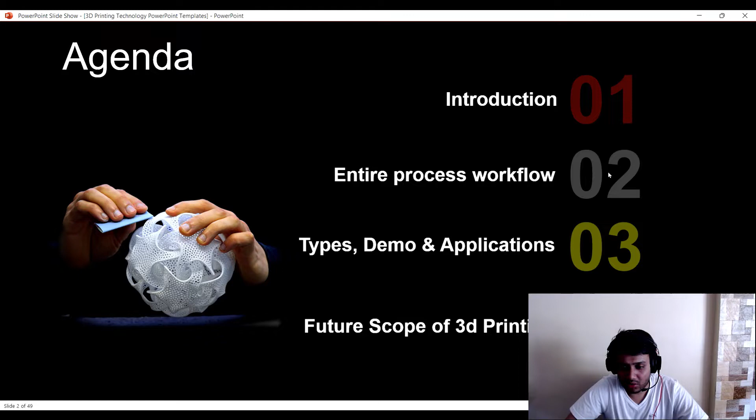So to start, let me ask my audience, you have been engineering students. Rather than saying, I should be asking you, tell me what are the differences between subtractive and additive manufacturing, or let me know the advantages of additive manufacturing over subtractive manufacturing. You could use your chat box. I will be noticing it.

So I will try to log on from one of my screens. I want some more people to try. Come on. What do you think will be the advantages of additive manufacturing over subtractive? Even the coordinators could try this out. Come on, everyone. What do you think?

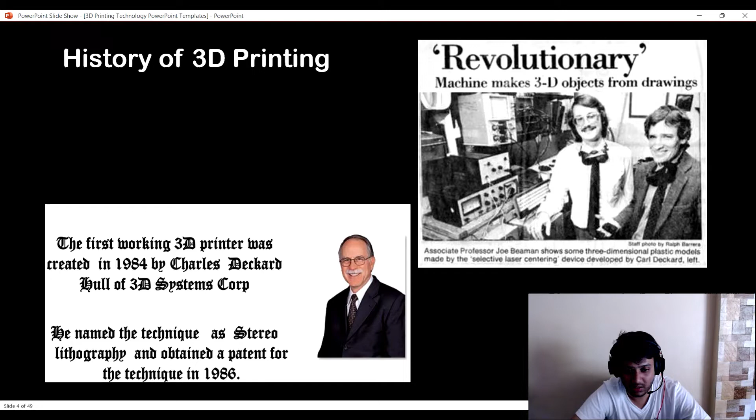Two people invented this; this was the first SLA machine. Again, what is SLA? We will go into detail. While these concepts were taking shape, a person named Charles Hull coined the term 3D printing and additive manufacturing in general. He is considered today as the father of 3D printing, and he founded a company named 3D Systems Corporation. We still consider his achievements insightful.

So to define 3D printing or additive manufacturing: it is a technology in which you form your products from a digital CAD file, in the form of a computer aided design, and that creates a solid three-dimensional part additively, layer by layer. When I say the process is additive, focus on the word layer by layer.

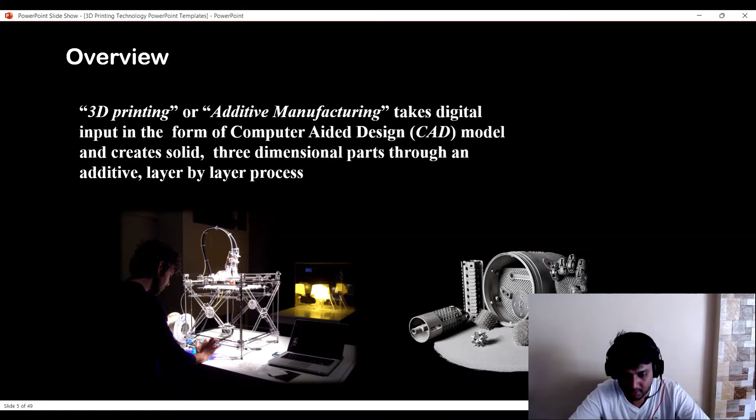There are different additive manufacturing techniques available in industries, or 3D printing methods in general. We will go through the major classifications of techniques. Let's start with the first, most common, and highly used by industries: fused deposition modeling, or FDM.

In this method, a strand of plastic filament is pushed through a heated nozzle, and that heated nozzle moves in a programmed pattern which places the heated plastic strand in the shape of a single layer of the part. This machine prints material layer by layer in an additive process with the help of a solid filament. The raw material used here is called filament.

To explain in detail: you can see there is material loaded, which we call a spool. There is a build tray present, and a nozzle. The nozzle moves in a programmed pattern along the X, Y, and Z directions in order to print the original part. It is a dual extruder printer, so there is also another material provided for supports.

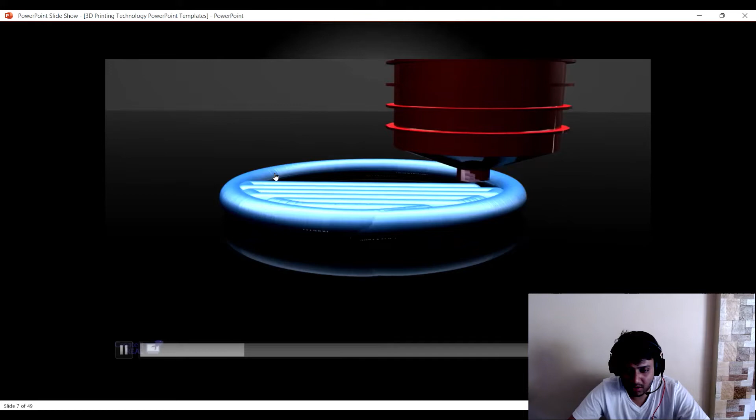Coming to all these things in detail in the course of this webinar. To make you sure you can imagine how things are happening, I have added an animated video for that. You could see that this is the nozzle and your build plate where your printing is going to take place. If I zoom in a little bit, the nozzle is really moving in a program pattern, covering the X, Y, and the Z axis.

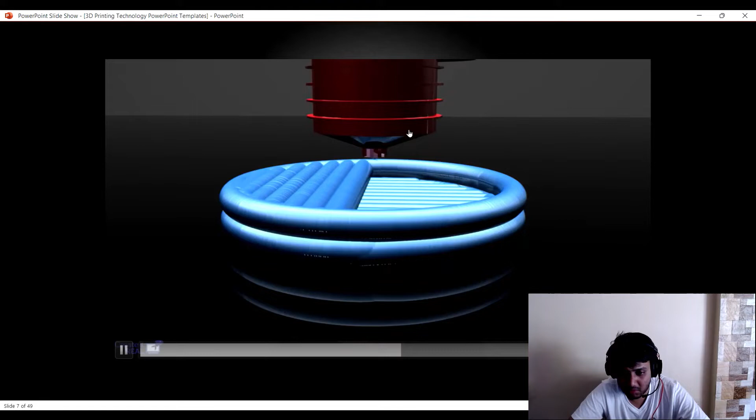So immediately the first layer gets covered, that's the X and Y axis, it shifts the layer and moves to the next consecutive layer, and then again completes the same process. This nozzle moves in such a program pattern. This pattern is nothing but the file which the designer, a CAD modeler, or a design engineer has designed, and it has sent it over for a 3D printer to manufacture it. This process goes on, and at the end you will be able to see the final product coming out as a consequence of all these layers being added one by one.

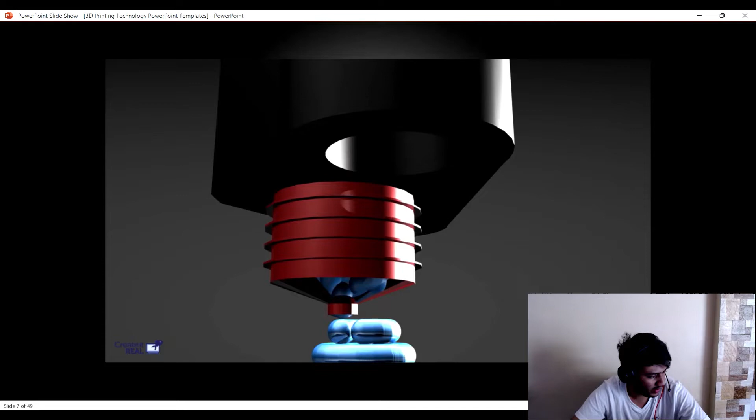Look how that's happening. I hope you are understanding till here. You can drop in a +1 in the chat box if you are getting this.

So this was the fused deposition method, which in European countries is also called FFF technology, fused filament fabrication. There are a lot of terms coined for it, but in general we call it the FDM process. Now, what happens in FDM printers is that most of them don't really have a build envelope, they are open.

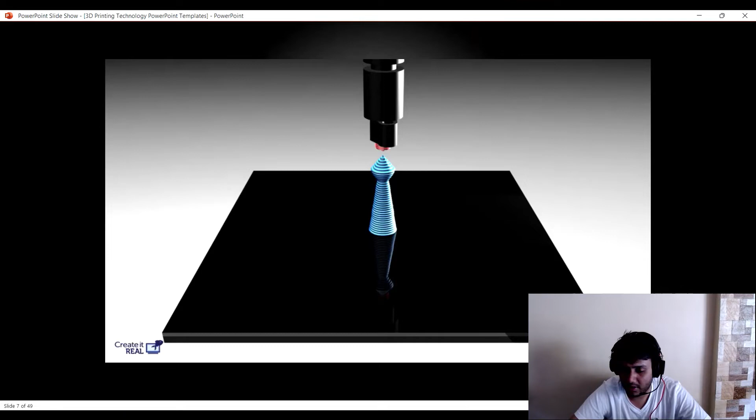However, certain printers do also have a completely enclosed build envelope. That depends upon what sort of material you are printing and what sort of technology you are using. We will be covering the entire thing in detail over a few minutes.

So the second method is nothing but the stereolithography apparatus, or the SLA process. It is an additive manufacturing process that works by focusing an ultraviolet or UV laser on a vat of polymer resin. A UV laser light falls on a vat of polymer resin.

Now what happens here is there is a high frequency laser light which passes through two, or let's say three, lenses being rectified, and a galvo motor system acts in between in order to direct that laser into a vat of polymer resin.

So the basic difference between FDM and SLA is the raw material used for 3D printing. In FDM the process used a filament, a solid material in general, and here we are using a liquid resin. That's the key differentiating factor between the two processes.

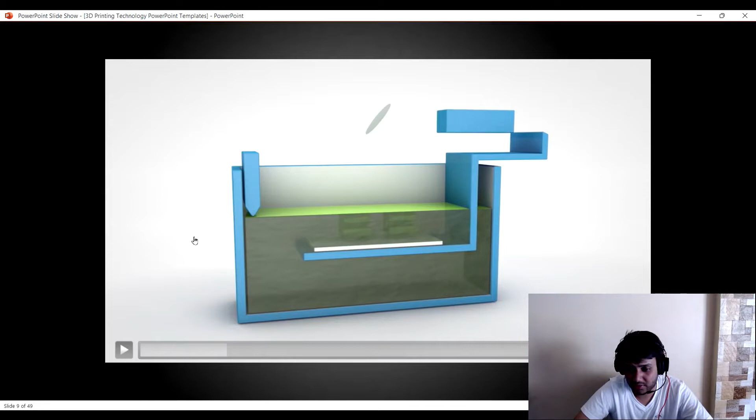We could see that there is a vat of polymer resin which has been stored in this particular box. So this is what you call a vat. Note that this entire process is highly enclosed, since the resin is UV sensitive and needs to be protected from direct sunlight. So it has been highly enclosed. This is something that happens in and out of the machine.

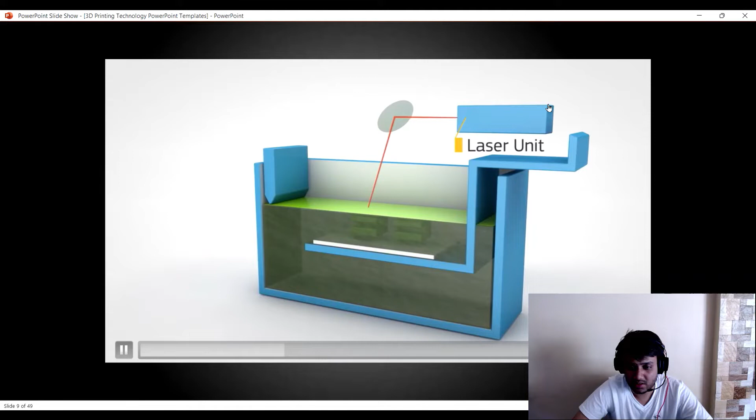So this is the vat of polymer resin where the resin is stored. This is the laser unit which depicts the laser, and there is a galvo motor system. The role of the mirror is to redirect the laser light which is coming in between, and apply it towards the point of contact where the designer has designed the part.

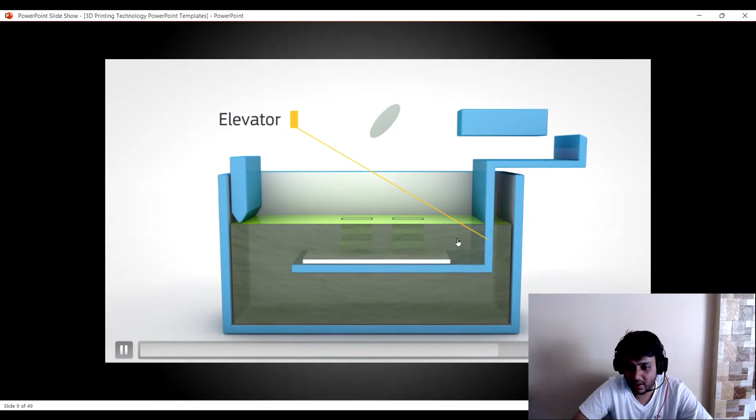Then what happens is, when it solidifies the first layer along with the support structures if needed, and the part is completed for that layer, there is an elevator which shifts itself, and a recoater blade which moves to and fro, which is important to clean the uncured resin that sticks predominantly over the last consecutive layer. This is going to completely clear that uncured resin and wipe it out to a certain location. However, this resin can also be used after some curing process.

I'll tell you this in detail. In additive manufacturing, you are firstly using less material, using the optimum method, and the waste, which I wouldn't call waste, but the uncured part of the resin, can again be used. So this industry 4.0 technology is truly building a sustainable ecosystem for manufacturing processes. I hope you agree with my point.

So this is how the part looks when it is removed from the vat. When it is removed, you also have resin sticking to it. I will talk about how to cure these things in detail.

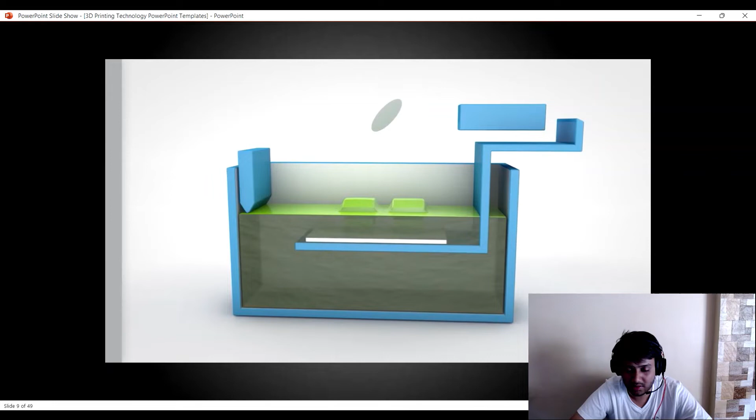So the third and most important method is selective laser sintering, which happens in the industry. In the first method, a solid filament was used as raw material. In the second method, we used a liquid resin as raw material. This third method, selective laser sintering, is an additive manufacturing process similar to SLA, but instead it directs a laser in 3D space and hardens a point at that contact. A laser is still used to produce the solid part, but it interacts with powder instead of the liquid resin seen previously.

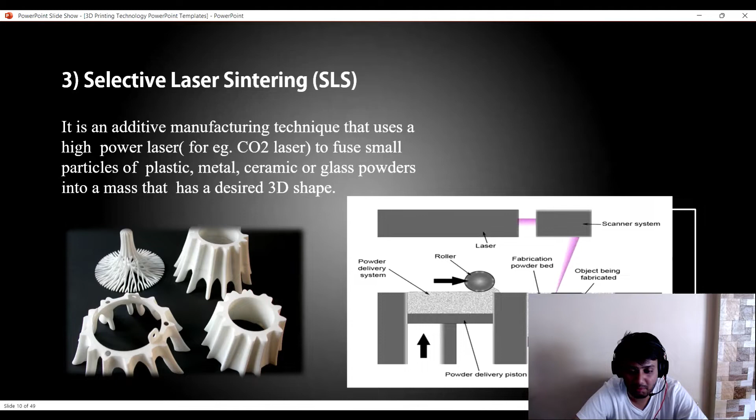This laser, since it needs to harden a powder, must be of certainly high power. So this is a high power laser light, a CO2 laser, used to fuse small particles. The materials used here include nylon. You will use SLS for high order materials like PA12, as well as ceramic and glass powders, and the process could be optimum.

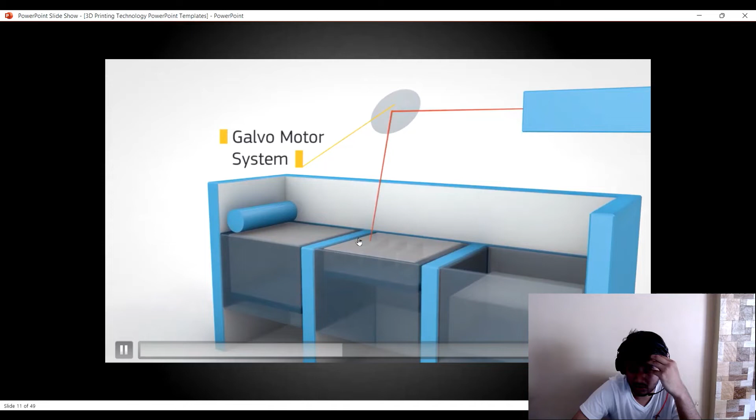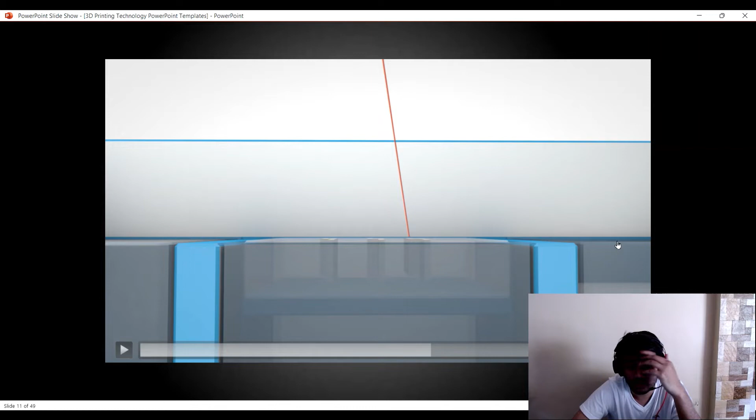The section of video being shown is similar to the previous one. Note the difference is that there is a powder instead of a liquid resin here. You can see this powder supply container. There is a roller which cleans the uncured powder sticking on the first consecutive printed layer. The same process takes place again. Here there is a completely different, dedicated section for storing the uncured powder, which will again be used after the course of printing.

So again you are using the waste and promoting the raw materials to be reused in the process. This is cleaning the uncured part. It has a dedicated collection container because it is a powder resin, and it can be reused over a course of time. So this was the entire theoretical part. I hope you got it digested, and 3D printing is not limited to these basic methodologies. There is also the SLM process, selective laser melting, wherein you use high order materials like metals, basically aluminum, titanium, and steel, which are in high demand.

It is used to create metal parts specifically. So industries who are economically sound, they use all these processes in their ecosystem. So to conclude, you may see that the technology which we are using is going to depend upon the type of product which we want to manufacture.

So suppose if you want to manufacture functional parts which can be used in functionality testing, you can go with the SLS process, wherein nylon or PA12 can be used easily, and you could really replace the exact material which you had been using.

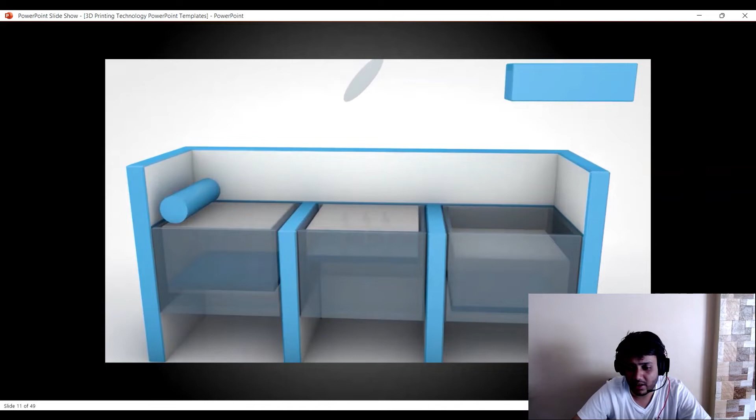So for an instance, let's say a metal bracket for a part which was applied some boundary conditions, some loading conditions, you could use this 3D printed part as a replacement part. And there are industries focused on this, which I will be covering in the application sections later.

So the basic steps involved, and this is the new methodology which comes into picture, is a CAD file is created by a designer, a design engineer, and that CAD file is sent to a machine. The machine is going to 3D print it, and you will be able to get that object ready before you. However, it is not really as simple as it seems from the pictures above.

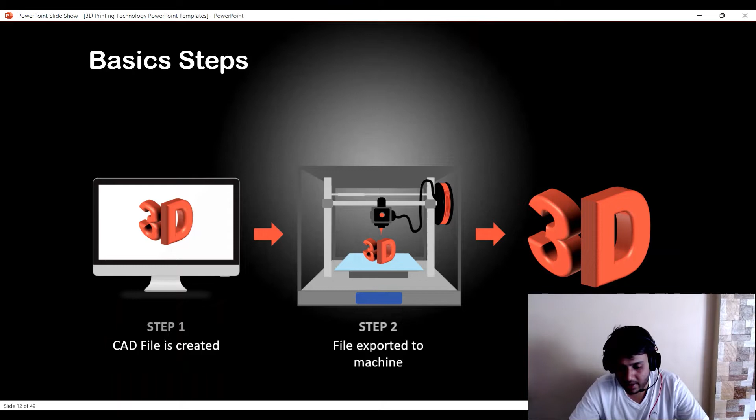The entire industrial depth of the process goes without saying: when you design the CAD model, it needs to be converted into a file format that your 3D printing machine can accept. Let's say if you are using an Autodesk software for designing and 3D printing, the Autodesk software's file format is not going to be accepted by any 3D printing machines.

So what happens behind the scenes is a 3D model is converted into a neutral file format which is generally accepted for 3D printing. We call it the .stl file. It's the most commonly used file format in 3D printing. There are several other file formats like .3mf, .amf (additive manufacturing file), .obj. Varieties of file formats are available depending upon which slicer software you use and what it accepts.

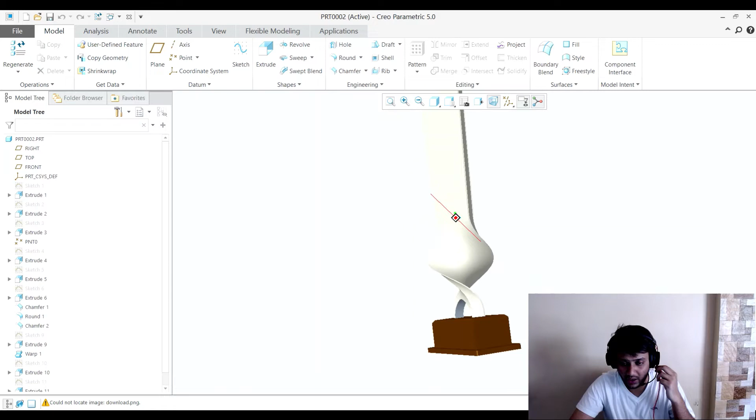So this is how the entire design workflow takes place behind the scenes. We will get into the details with a practical demo also. So let's see, I'm currently using Creo Parametric software. Let's say I had designed these things a few years ago. I have a solid file which I created using the software, and let's say I want to 3D print it.

So what I will be doing here is following a generalized method, which is common for all the software you might be using. I will go to File and then Save As. For the file format, we will be using a stereolithography file, .stl, as it's one of the most common file formats used for 3D printing in general. So I am using the STL file.

I will locate a directory for that. So if I open here, I will get some additional options. These are the two formats available, binary and ASCII, the two most important STL file formats. We could always click on tessellate the shapes in order to get a good result, but not now, since I would like to keep the original profile. So I will just click OK.

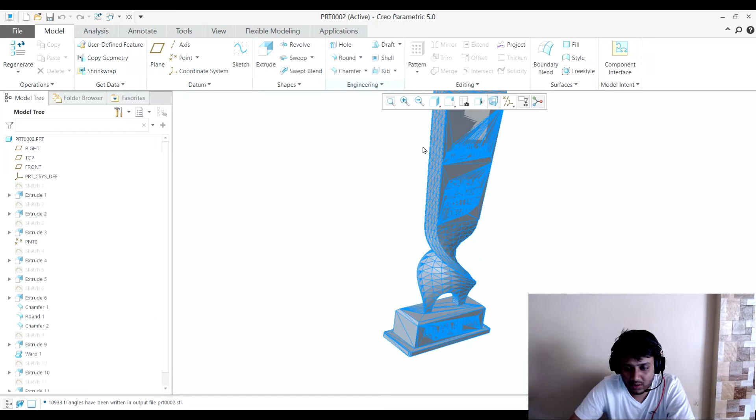Now, could you see the file is being converted and it has been saved in that directory, and now could you see that it has been converted into a mesh-like structure? Can you see these meshes? Please drop it in the chat section. Okay, I hope it's visible.

So this is nothing but your .stl file. Now your slicer software is going to interpret this file. It is not going to recognize your native CAD files, okay. Keep this in your mind. It is a very common problem which a lot of people face.

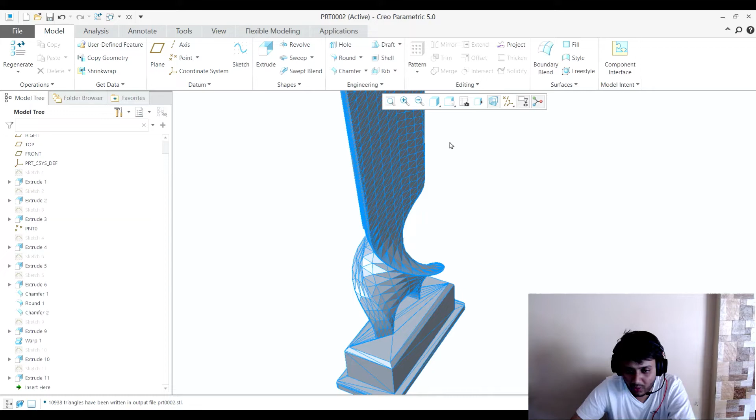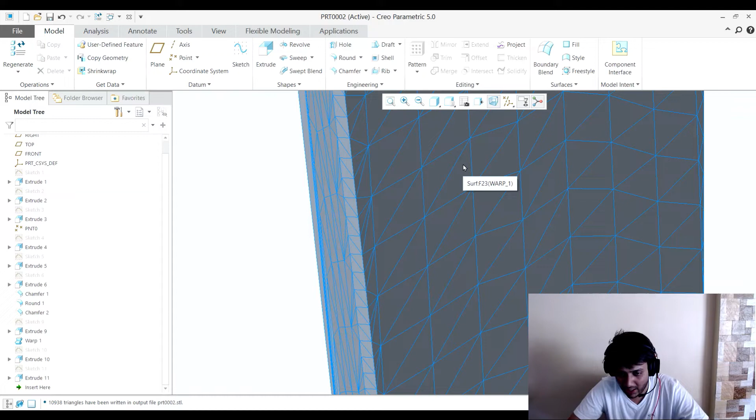Now what this STL file comprises of is a lot of facets. You could see these triplets, these triangles. 1, 2, 3, 4. These are nothing but your facets. A combination of such triplets is going to form a mesh. It is going to vary upon the type and the size which will be involved. So for instance, if you see that the geometry is really getting organic right here.

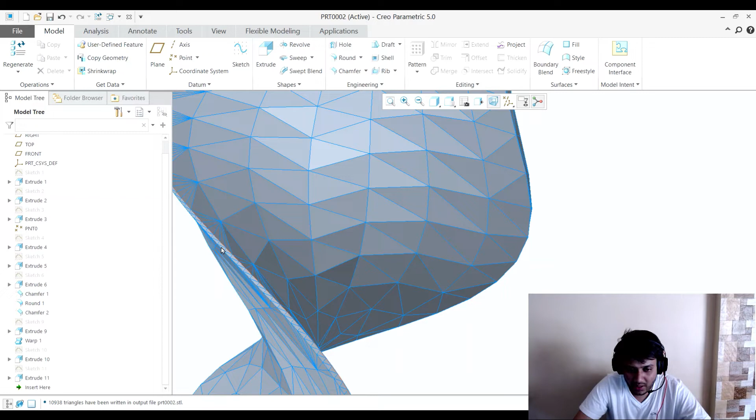Okay, so you could see they have changed their shape, and they have converted themselves to match the shape of that geometry. So at very curved edges you could see they are very small, but where there is no need, they have formed themselves at a large size if you compare. So this is what I wanted to showcase to you. The formation of STL happens with these triplets, or let's say a combination of facets, to form that mesh, and this file will then be exported for 3D printing into another base software.

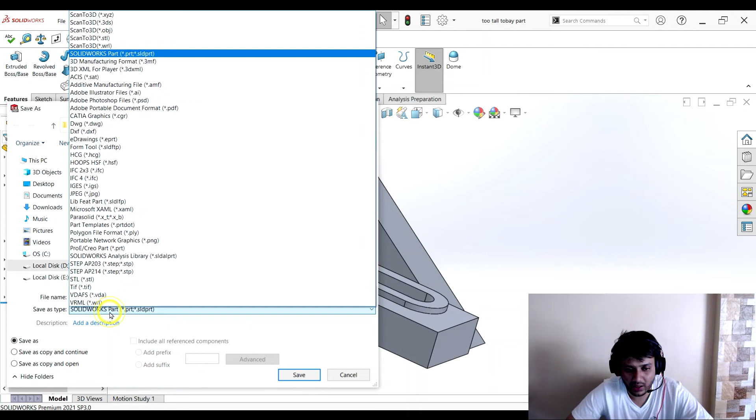So let's consider another one. Okay, so I've opened a part model for you. I'm going to do the same thing: again I will go to file, save as, and again I will be opening the STL file. To save it in STL, I will have a few options there. To choose the type of file format we want, I will be selecting the type of resolution which is really needed. The coarse resolution means the formation of the triangles is going to be really coarse, okay, of less quality basically.

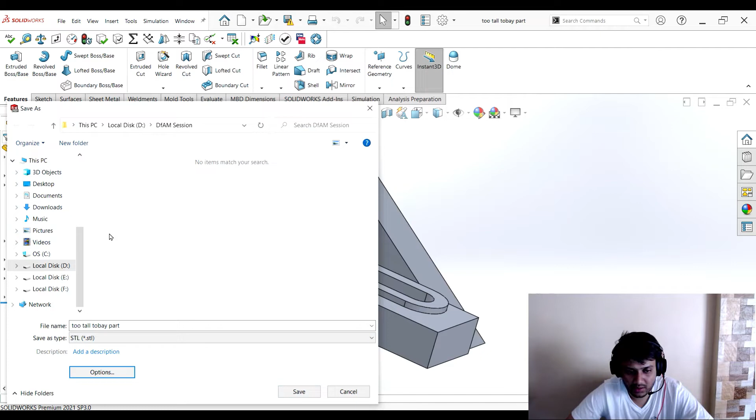But if I go to fine, you could see that it has changed to a complete sharp circle, which it was not before. So that's the difference between the types of resolution. Again, if you use a fine resolution, your number of facets is going to increase. Again, I will hit OK, and I will save for that particular session. So you could see again the software has converted, and it is asking me whether I have to save.

So the number of triangles formed for this small part was 492. It was 29684 bytes in size, and the file format will be binary STL. So if I am saving it to that location, you can again get your CAD file there. So that has again been saved there. So this was all about basically saving a file into an STL. The STL file will then be shifted to a third-party application.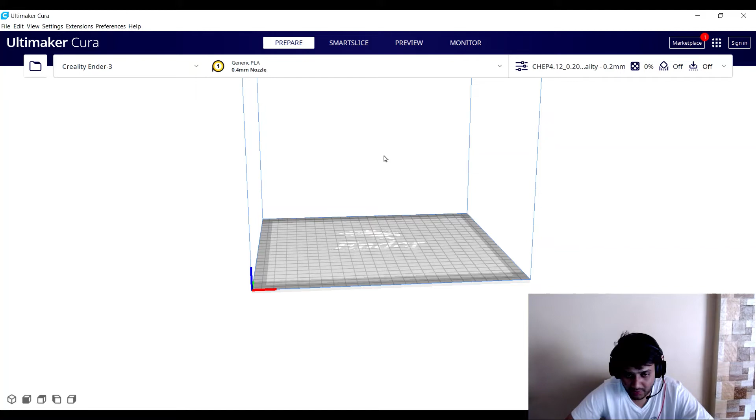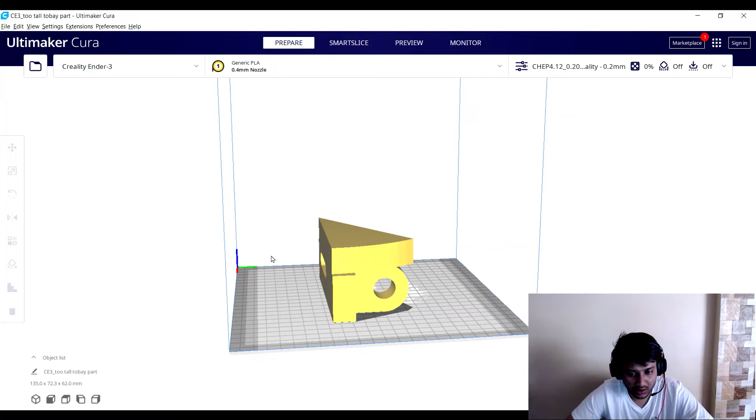And when I talk about third-party applications, one of the most wonderful applications available in the market right now is Ultimaker's Cura. Now why Ultimaker's Cura? Because it's an industry-leading company in 3D printing, and it has its own industrial-grade 3D printers which are used extensively in the market at the high-end range. So this is where I have imported the file in another third-party software.

Note that in certain high-grade software you also get an option to integrate the file or the third-party applications with the CAD software. So let's say if I talk about SolidWorks, I'm going to add a, let's say, macro.

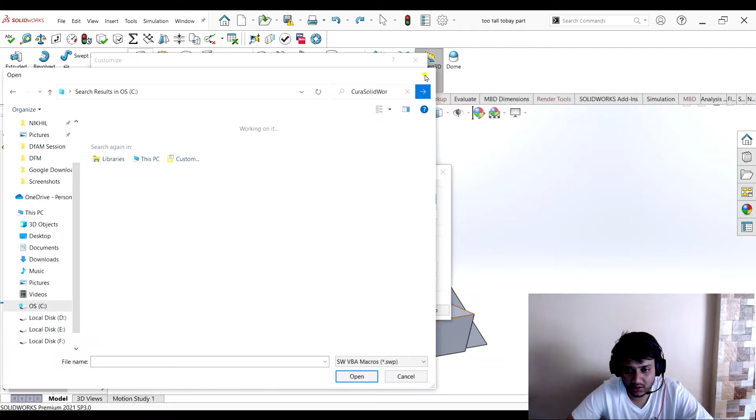So if I add a macro in my software, it is going to directly convert that part, and it's going to reduce my hassle of working with the number of steps for converting that into an STL. However, certain high-end products also have integrated features which allow you to 3D print the structures. For example, in SolidWorks we have the Print 3D feature.

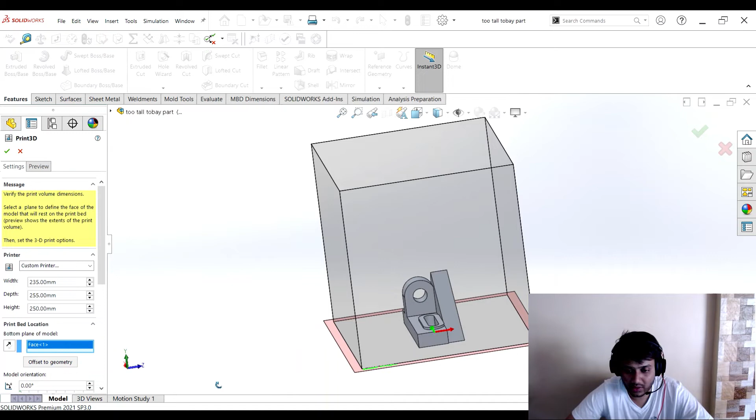So you could see that the same feature is available as we saw in the third-party software. So there are high-end products in the market; the CAD software is also allowing us to 3D print. I will be explaining the 3D printing process in the third-party application for the time being, but let me just cover the types of materials which are involved in the 3D printing process.

So firstly, let's talk about the materials. To briefly say, we have materials which are available in 3D printing, but these materials are also a finished product of some raw materials. Now the raw materials used in industries will depend upon the type of material you have to produce. So let's take an example of ABS first. ABS stands for acrylonitrile butadiene styrene. ABS is a widely used material in the industry.

It has a high glass transition temperature and it has less density. It produces rigid and strong parts, due to which the 3D printing industry is extensively using this material, having a melting temperature of about 210 degrees Celsius, making it possible for most base variants of printers to print it.

Secondly, we will talk about polylactic acid, nothing but your PLA. It is a biodegradable material. That means it is made up of eco-friendly, environmentally friendly materials. It is made up of dry sugarcane residue, which you get after it is soaked and all the liquid is removed. So this is a raw material which we use for making PLA. That's the very reason why it is biodegradable and environmentally friendly.

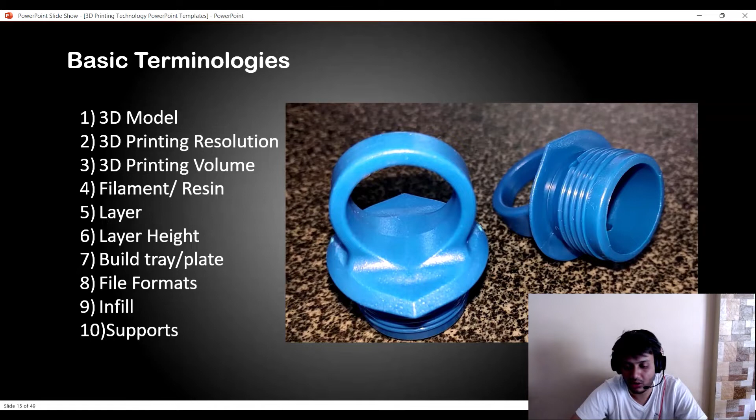So I can see a variety of answers again. If you look closely, you will find a strand of material, a leftover you could say, behind this particular component. This is a bottle top, and it is mostly manufactured by injection molding processes, but you can see it has left over some parts, right? So that is why the right one, as many of you answered, is a 3D printed part. You can see there are some strands of material left over. To eliminate this type of leftover, there is an additional process in the 3D printing industry which we call post-processing. Which brings me to my next slide.

It is the process in which you remove the supports, the leftovers, and the unclean parts of your 3D print, with methods like sanding, as you have seen in the picture right there, or maybe using some third-party components. For instance, post-processing involves steps like removing the supports, cleaning, fixing the print, and sometimes curing or hardening. If you are talking about SLA, there is a UV sensitive resin. So when you remove the part from the 3D printer, you can expose it to direct sunlight, or an established UV system, which is going to cure it. Surface finishing is also another way.

You could use a buffing machine to just clean and surface finish the product, or maybe you will be using a sandpaper. I tentatively try to use sandpapers of, let's say, 300, 600 grits, depending upon the type of surface finish which I want on those components.

Coloring is another post-processing way, in which you could 3D print it in a common color, let's say white, and then give it your desired color. So again, this is coming into post-processing. You could also soak some materials in water. This is also possible. The technology has also made this possible.

So let's say if you are printing a component and you are attaching the supports with a second material which is called PVA. PVA is a water soluble material. Once you 3D print it, you just need to soak it in water and your part is going to completely remain in the water, and the supports which have been established in that 3D print are going to be drained away, or let's say soaked in the water. So these were all the post-processing ways.

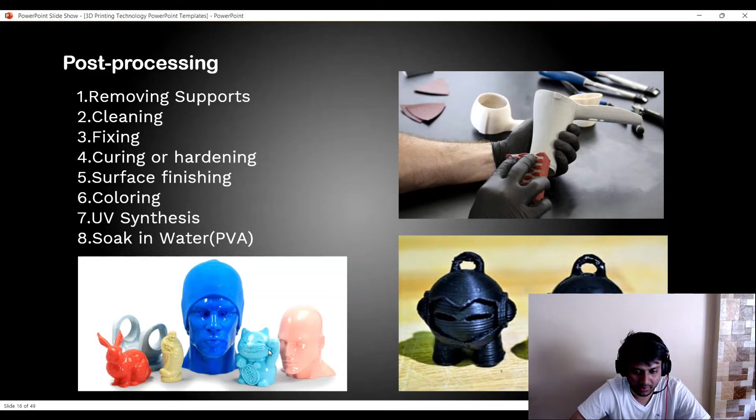Parts which we will be printing with ABS are going to require acetone, and parts printed with PLA are going to require isopropyl alcohol as a post-processing agent. Isopropyl alcohol is available with 70% or 90% concentration, depending upon the type of smoothness and finish which you want. You could see these parts printed with ABS or PLA, rubbed and polished with those post-processing agents respectively to get that high quality, nice surface finish. So this was all about the post-processing materials.

So to now explain the importance of part orientation, I will be focusing on my previous screen. This is a file which I have created in SolidWorks. To go for the slicing, we need to completely understand the importance of orienting that part. People who think this should be the ideal orientation to print, keeping the surface which I have highlighted as the base, should type left in the chat section, and people who think this should be the orientation should type right in the chat section.

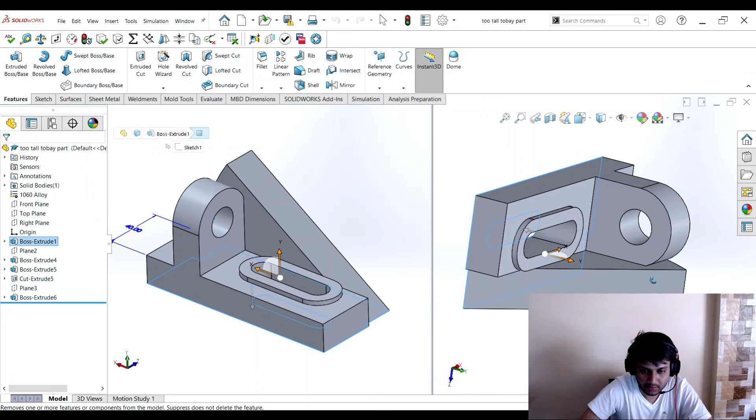Okay, so let's check how many people are getting involved. Even the coordinators can try, everyone. Rahul is saying left, Abhijit is saying right. So again, I will repeat: if you think this is the orientation, keeping this as the base, please say right. And if you think this is the orientation, keeping this as the base, please say left. Omkar is saying right. Jay Prakash is saying left. Kunal is saying any. Come on, some more people could try this. Pawan is saying left. Yash is saying left. Amulya again saying right. Okay.

I see that in the chat box you have tried to address one common question about the future scope of this and job opportunities. As a design engineer, what you will be judged on is the way you 3D model that part. That's absolutely true. But sending a part for 3D printing also requires an ideal 3D printing orientation. Selecting an ideal 3D printing orientation is extremely important because it tells you how the part is going to be manufactured.

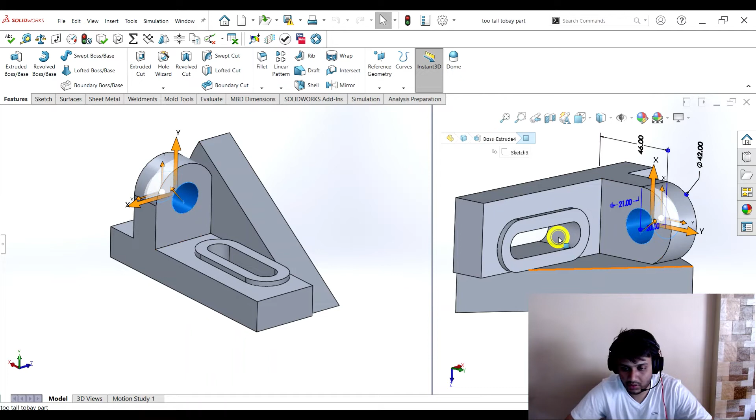Now, when I asked which should be the ideal print orientation, most of the people said right. Few of them also said left. Now, imagine if I had used the right side, keeping this as the base. There are two such instances, number 1 and number 2, where there are cutouts in the part, and these cutouts are going to require supports.

So the moment you put in supports in your 3D printed object, what are you doing? You are going to increase the print time, you are going to increase the usage of material, and increasing print time and material usage also involves a third process, the post-processing process. So there is time, effort, and energy being invested.

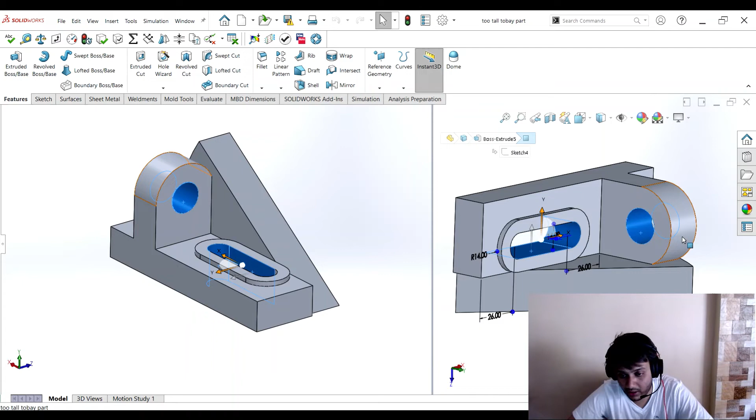Now consider, for the people who said the left side should be the print orientation, there is only one instance, like this circular cutout, which is going to demand support. Correct me if I'm wrong.

So this is what I wanted to explain you guys. The file which you send for 3D printing, no doubt there are software which will interpret the best possible orientation, but it's not always right. So you need to understand the orientation property, and as a design engineer you should understand what is the most suitable part file orientation for 3D printing.

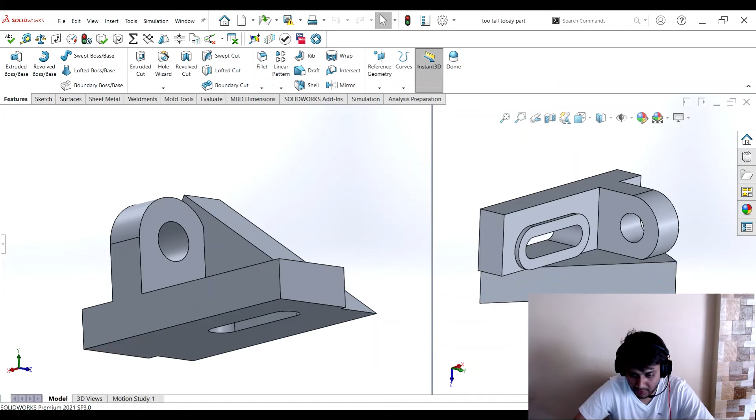To be honest, to keep it general, people tend to select a base which is flat, covering major portion of the area, but they don't consider the later aesthetic views and considerations while 3D printing the file. So for instance, as a lot of you said, the first part is going to be the ideal print orientation, which should be in this particular way.

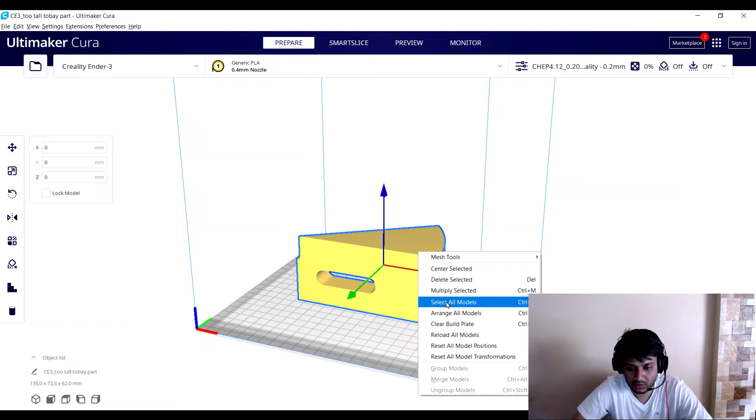So let's see, when I import this into my third party software, what features do we have? Look, when I import it, again if I try to delete it, click on import, select that part, and click OK. Look, it has imported it in a completely absurd way. So this is not at all preferred.

Alright, for people who are new to 3D printing, they just ignore these things, and if you try to 3D print it with this particular orientation, it is going to demand a lot of support areas. The software is not going to tell you that you need to think and make sure you are using the correct orientation. It's up to us what we have to use.

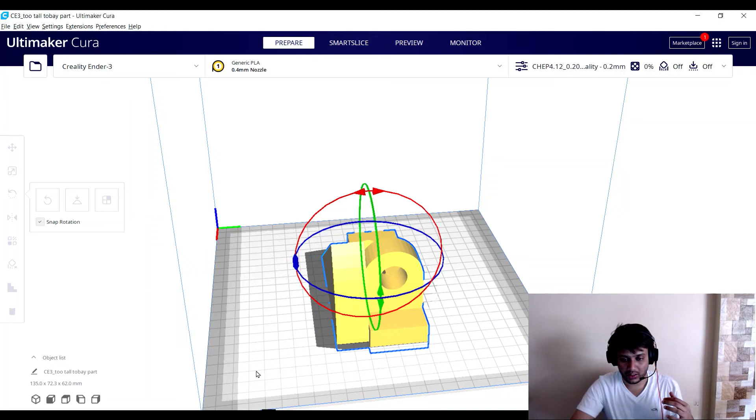So what I will do here is change the orientation by turning the model, and look, it's done. So I have changed the part orientation.

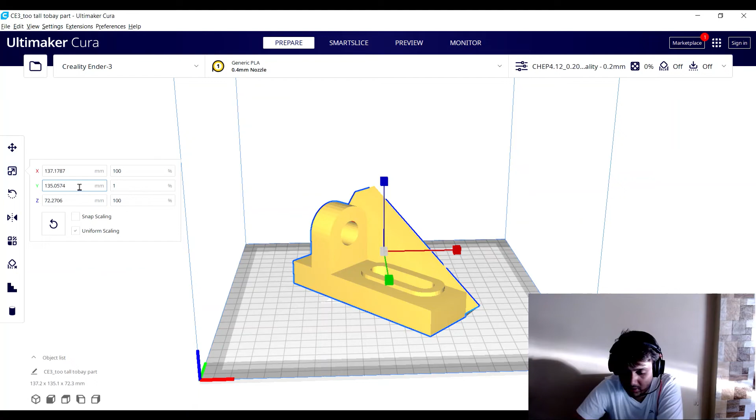Let's see the majority of settings we need to take into consideration while we 3D print. The part file could be enlarged or diminished based upon the type of model you want to print, based upon your needs. So if I want to scale it up, let's say by 20%, 120, hit enter. So it is scaled up.

Now what's important here is to make sure that the supports reach the right parts. You can see there is an area highlighted in red. This is the area which is going to require additional support material.

So when I go to settings, what I will choose here is the optimum layer height required for this to be printed. I will choose a layer height of 0.2 mm, and for the time being this suits my settings and my needs. I will select the infill to 10%, hit enter. So the complete product will be filled 10% with material and 90% will be void space.

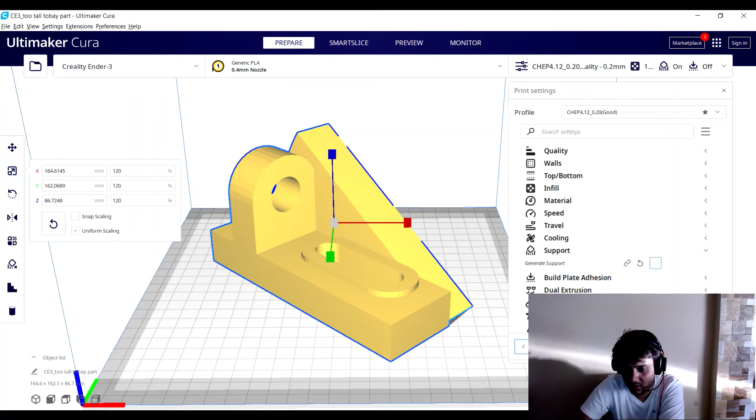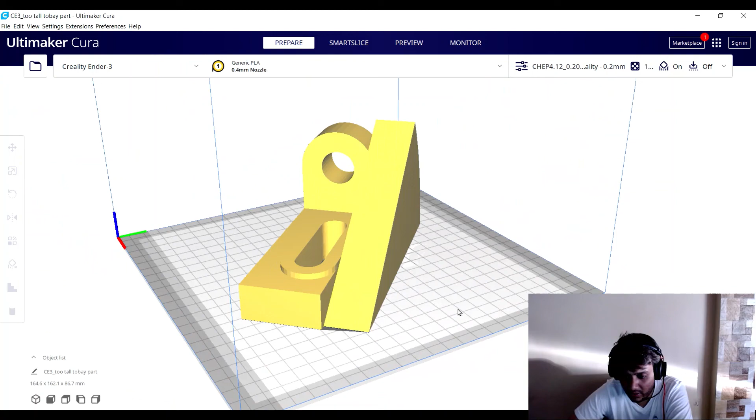Okay, so when I hit on slice, the software has given me two valuable instructions: the total print time required to manufacture this part with a 3D printing layer height of 0.2 mm and 10% infill, and it is going to consume 106 grams of material. If I click on preview, it is going to showcase an entire preview of what happens when the part is being 3D printed.

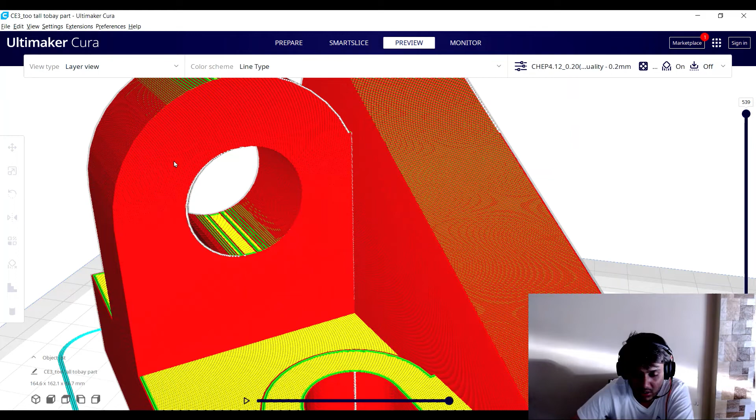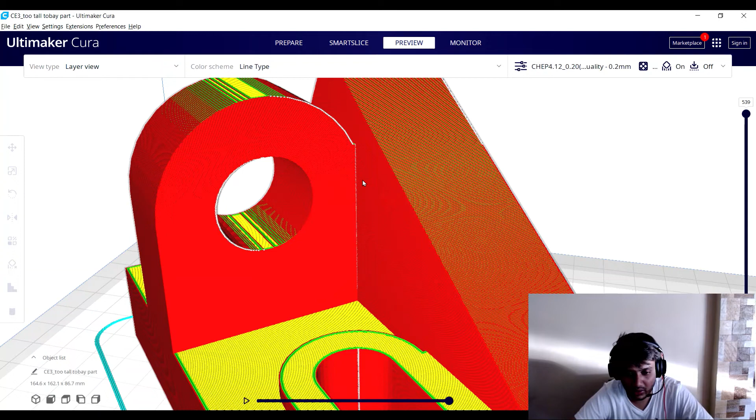Now you'll be asking me, hey Nikhil, why didn't it use supports right there? It's because I decreased the support angle since my printer is somewhat capable of producing supports on circular edges like this. Supports, I forgot to mention, are used extensively when you need to 3D print objects with overhangs greater than 45 to 55 degrees. Most printers won't be able to print material at that percentage of overhang angle, so if your printer is capable, you could go ahead.

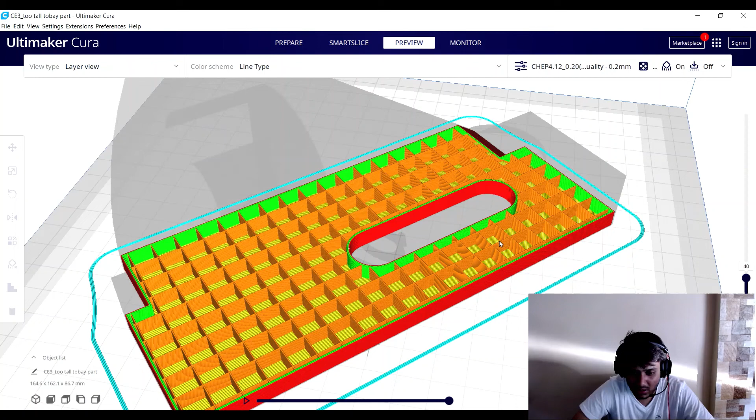So this is what the part is going to look like. If I dig down a little bit, it'll showcase how it looks from inside. This is the infill of 10% which I mentioned, and if I show you, there's a nozzle moving and depositing layer by layer. Right now we're at the 40th layer of the part - you can see the number here, and this is the direction the nozzle travels. The nozzle prints the infill, then shifts itself to the 41st layer, the next consecutive layer, and continues the same process until it reaches the top. That's the process involved right there.

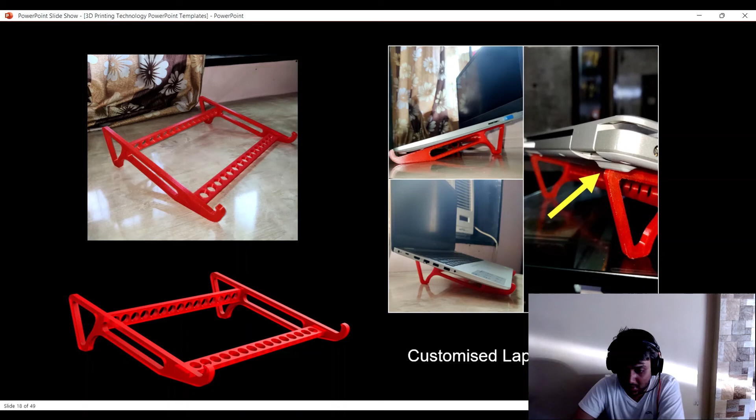So let's look at some objects as part of application. This is again a customized laptop stand which I 3D printed - again a functional part, using PLA material. You could see the finished quality, how it's been used in the industries. This is how the 3D printing industry is working.

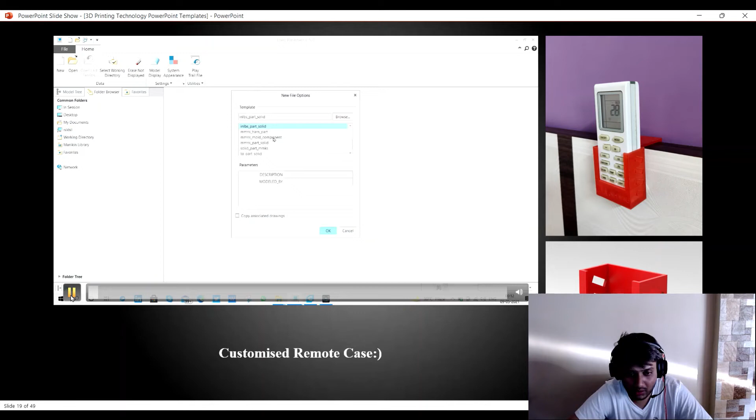Let's say I have another part, which I'm designing again in Creo 5.0. You could see me taking manual dimensions of a customized remote case. A remote is something we always tend to forget - we forget where we keep it. This could really be handy. I tried to design it in the software; it's a common process of designing it. You try to take manual dimensions, and you could really use the functional parts wherein it's stored.

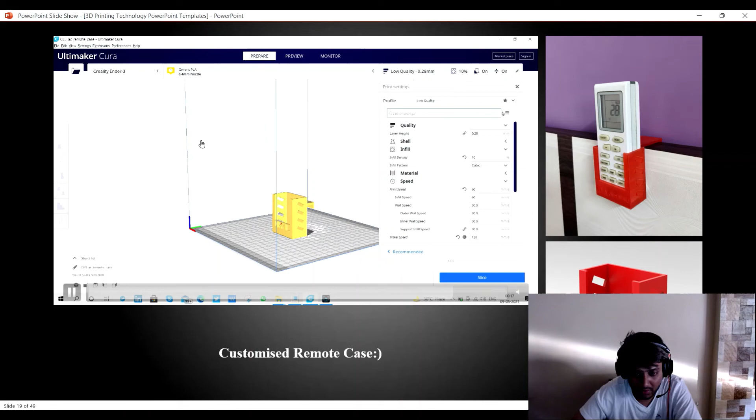After I design the part, I simply save it as an STL. I open it in third-party software if the software isn't integrated within a slicing environment like this. In that environment, I slice it down, save the file, and then it goes for manufacturing. Same way, again a customized mobile stand.

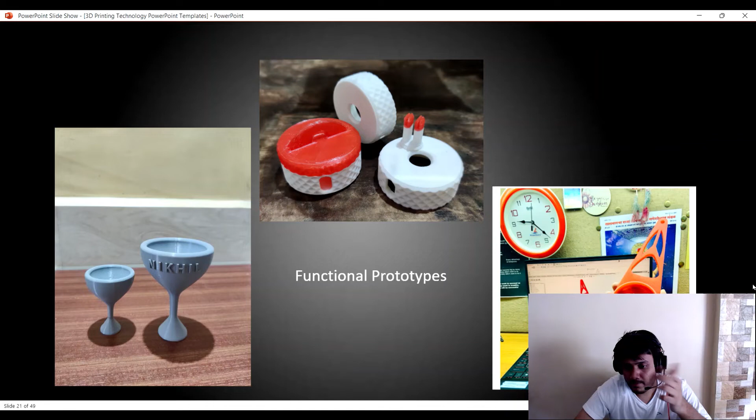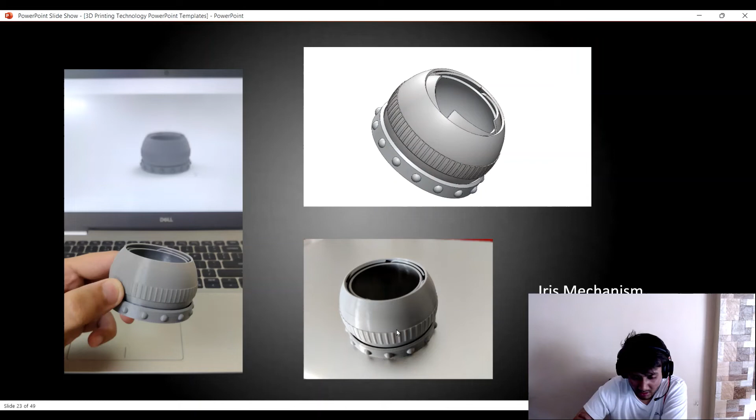These are applications of 3D printing industries - again a tablet case. If you really want, this shows the good quality and advantages of 3D printing, having a 3D printer and knowing the stuff that goes behind the scenes. You could create objects on demand, and customize it just the way you want. You won't believe this was an iris mechanism which I designed, and it was 3D printed in place. This was completely 3D printed in one particular place - this is not an assembly, it's 3D printed as one piece.

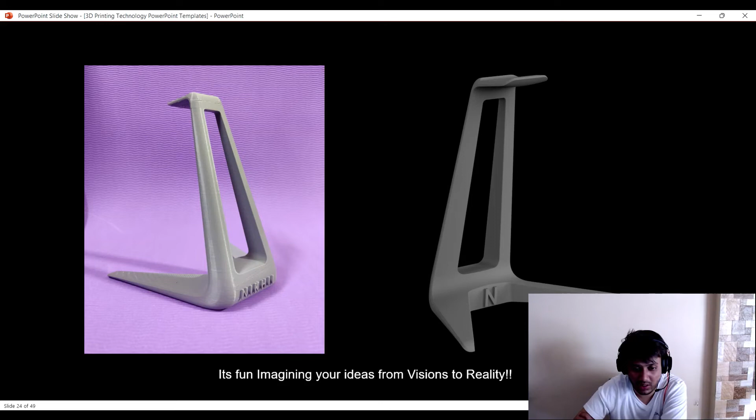Again, some more products like a customized headphone stand. This is how the 3D printing industry is - you could be using your own particular cases and designing stuff just the way you want it, and get those 3D printed. Monitoring your 3D prints is again an important step taken into consideration. Advanced 3D printers help us monitor the 3D prints even if you're not in the vicinity. Real-time monitoring is also available in certain cases.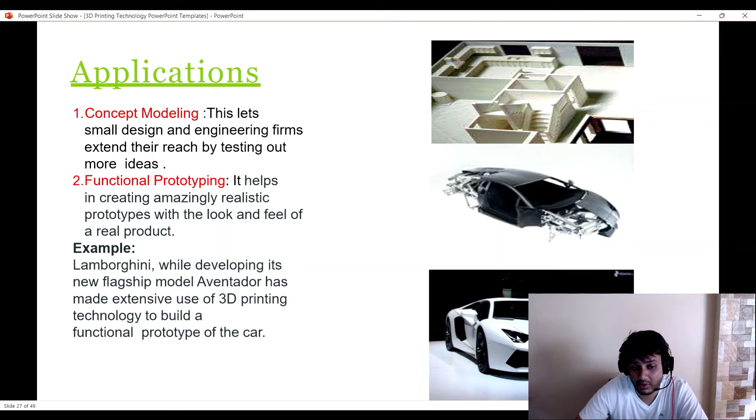Most of the parts were 3D printed while it was in the R&D stage, and it still is a 3D printed technology. It is a car from a company using 3D printing technology in an extensive way. So this was the first instance. You could use 3D printing in end user parts like I showcased you, in food and fashion even. There are 3D printers which can print food.

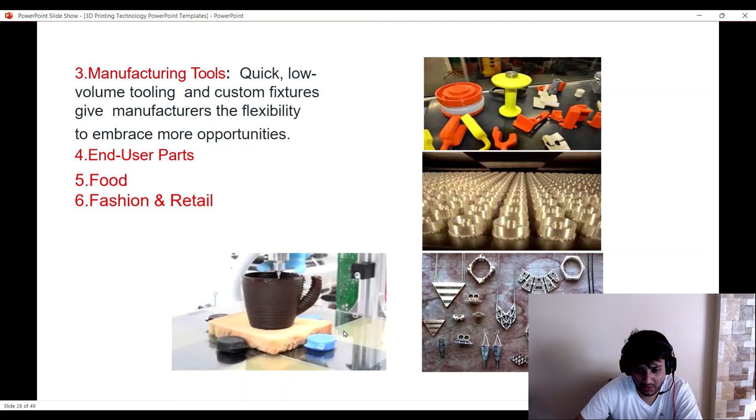Precisely chocolate, confectionery industries I'm talking about, it can also print chocolates. In the medical industry, you can also print. Bio printing, not getting much into detail, is also capable of 3D printing tissues and organs, extensively used in the medical and healthcare sector.

So if you want to showcase live surgery to students who are into the biomedical field, let's say, you can also 3D print a prototype of a heart model, maybe an organ which needs to be simulated, and you could create such real life scenarios wherein 3D printing could come into picture.

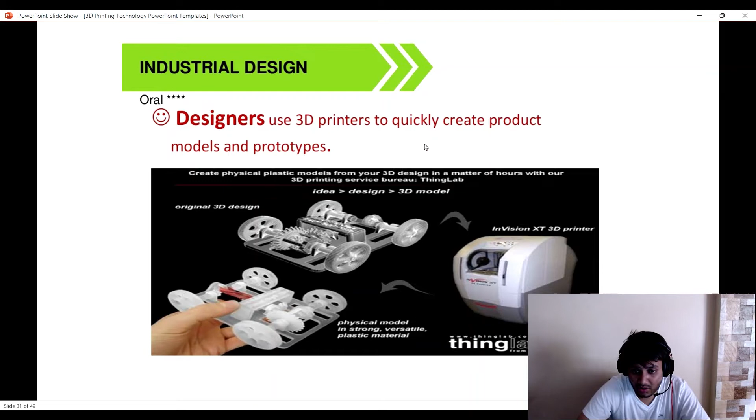Defense and aerospace industries, again, one such thing. Industrial designers are getting a lot of demand these days because the use of 3D printing in industry has increased to such a height that there are functional prototypes which have been redesigned, and designers are in demand because of that.

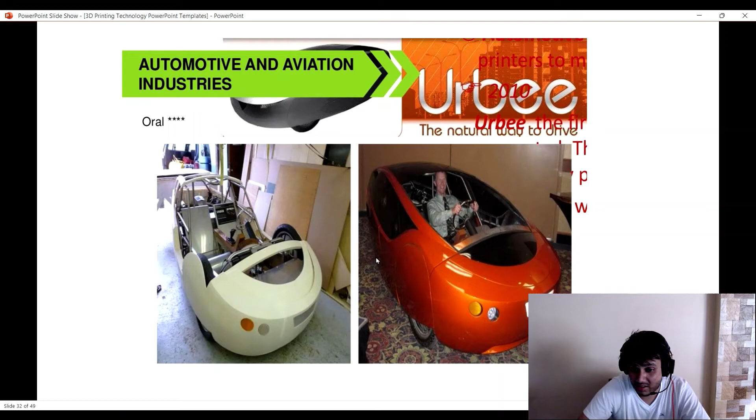Since 3D printers are used to create quick parts and industries really want this to happen. Again, automotive and aviation industry, it is also possible, as some folks in the chat even said. It is possible to make complex and integrated 3D printed shapes which a lot of industries, the injection molding industry, won't be able to make.

As I said, confectionery industries, which is 3D printing chocolates, for food preparation, is again another application.

Biocompatible materials like titanium are used in these cases, and this is eventually the next industrial revolution taking place. So we could also create objects on demand with the help of 3D printers, customized just the way we want.

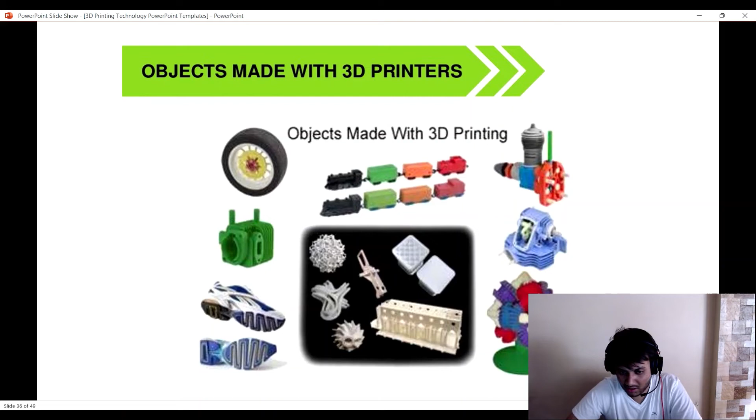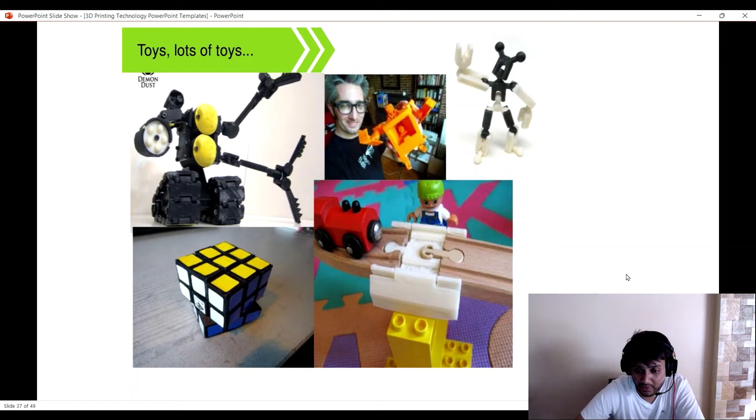Lots of toys, for a particular mass customized toy for children, is also happening. A lot of toys are being manufactured for children, basically for orphans who are special children with different disabilities. So again, some replacement parts, if you want to quickly make replacement parts and don't want to buy an entire tool suite of products just to replace one part, again, complex structures could be 3D printed.

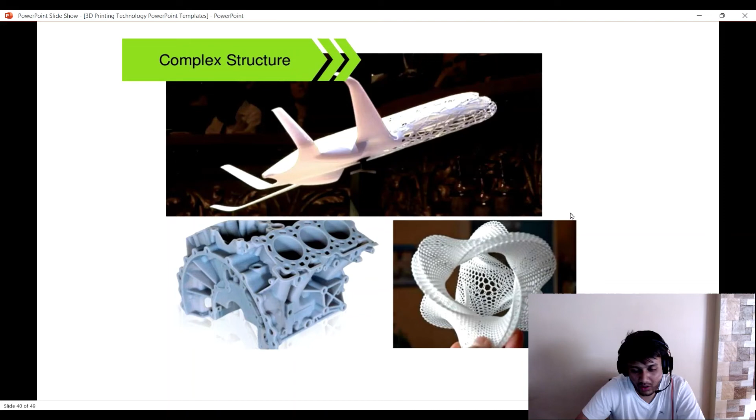So that's where your injection molding industry is going to lag. Your traditional manufacturing won't be able to make objects this complex and integrated. So this is how the 3D printing industry is helping humankind.

Like artificial arms for disabled people. So even I have worked on certain projects wherein we made 3D printed prosthetic arms for those who are disabled and not able to achieve a human arm like that.

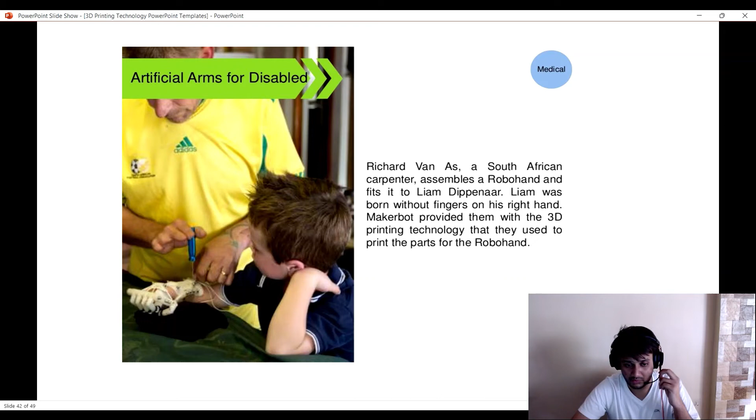So 3D printing could be used in such a way that the medical and healthcare industry, and literally any industry in the market, could certainly take benefits from it.

As I said, components on demand. You might see this in the aerospace and space industries, where objects need to be of minimum density while giving maximum performance. So 3D printed light parts could certainly be on demand there, wherein you will be able to achieve your requirements with certainly less density.

So the Liberator here is another device, let's say a gun, which was invented, and it was the first 3D printed and tested handgun in the world.

So the story is, the parts were designed in one locality, tested and 3D printed in a different locality, and the entire gun was 3D printed and it was able to shoot a bullet. The firing pin is also not made of plastic, though it is easily crafted from a metal nail.

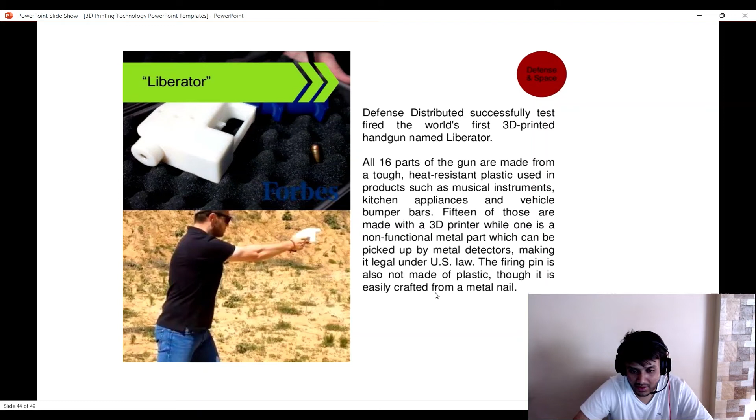So this is the vivid applications of 3D printing and the future scope which I discussed right now.

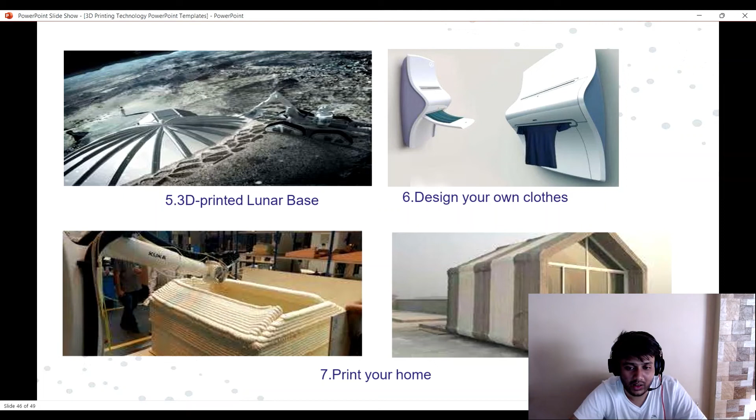So right now you could also see that the government is promoting Startup India initiatives. It has been providing aids for 3D printing houses. So when you go into 3D printing for construction, it is going to drop the construction cost to around 45%, and that's where the numerous advantages of 3D printing come into picture.

So the question comes, should you invest in a 3D printer? Yes, to improve your creativity. It is a really great tool to educate young children and help them be ready for this Industry 4.0. 3D printing is also environmentally sustainable, it saves a lot of time, effort, energy, and yeah, it is fun, and believe me, it is sort of an addiction when you get started. So this is all about 3D printing in general.

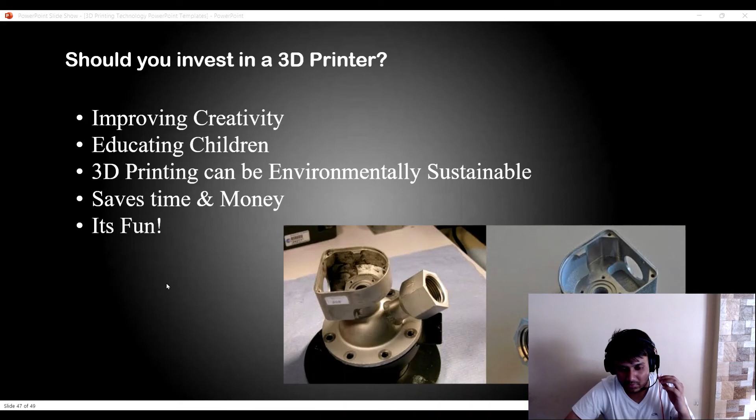So to conclude, I wanted to say, industry manufactures products, and additive manufacturing is coming into a lot of limelight these days. Additive manufacturing fundamentally changes and lets us create objects on demand using digital data, that lets us reimagine how we redesign products and how we define their performance, how we make factories more efficient and reduce our time to market. As a result, we are considering additive manufacturing to be the cornerstone of the next industrial revolution.

So with additive, it's really about expanding that design space. It's promising to change the traditional paradigms of how we approach creating something. Additive is going to change the way engineers are thinking about their job. It is going to be the next cornerstone for industrial revolution, and it is going to change the way production systems and engineering in general think. Eventually, implications of additive manufacturing for design and production are far reaching and probably beyond our imagination. But it's still early stage, so now is the time to get started.